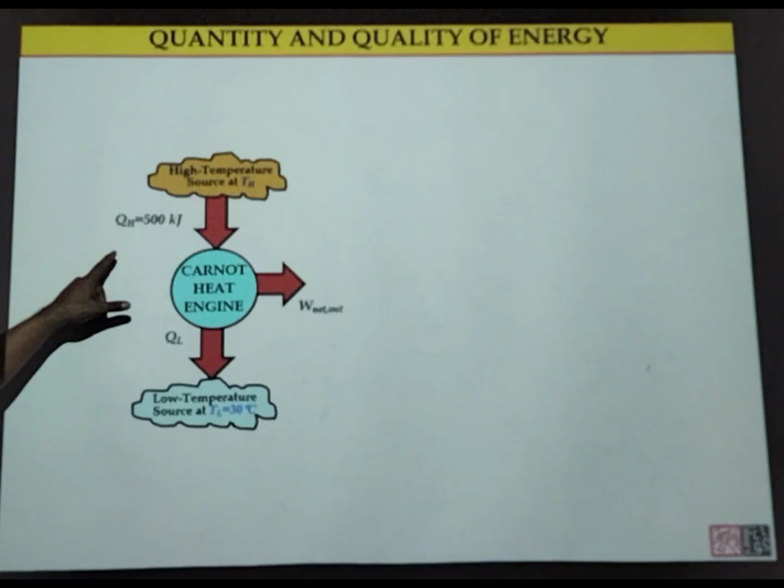Okay, the difference between quantity and also quality of energy. For quantity of energy, they cover under first law of thermodynamics. Any quantity, for example QH equal to 500 kilojoule, W net equal to what? 100 kilojoule. That value refers to the quantity of energy, which is covered under first law of thermodynamics.

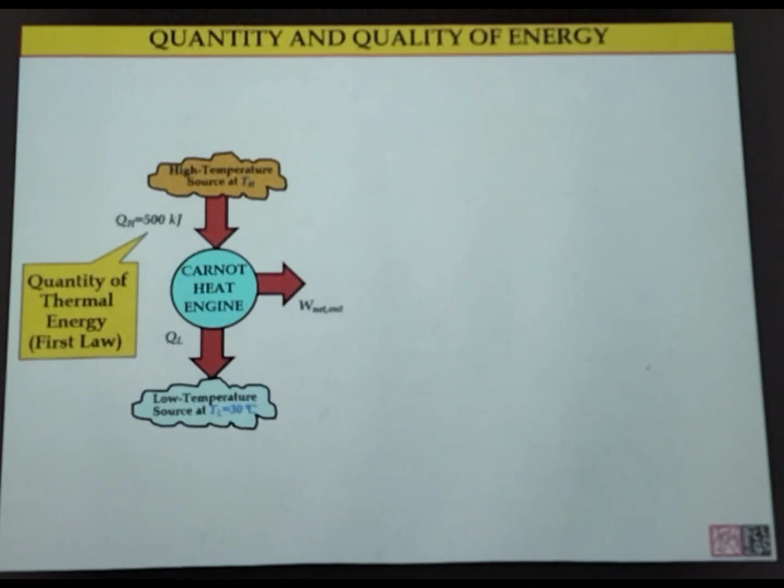If you consider second law, when you calculate the thermal efficiency for reversible process, for the ideal case, and compare with the actual one, that particular calculation will show you the quality of the energy.

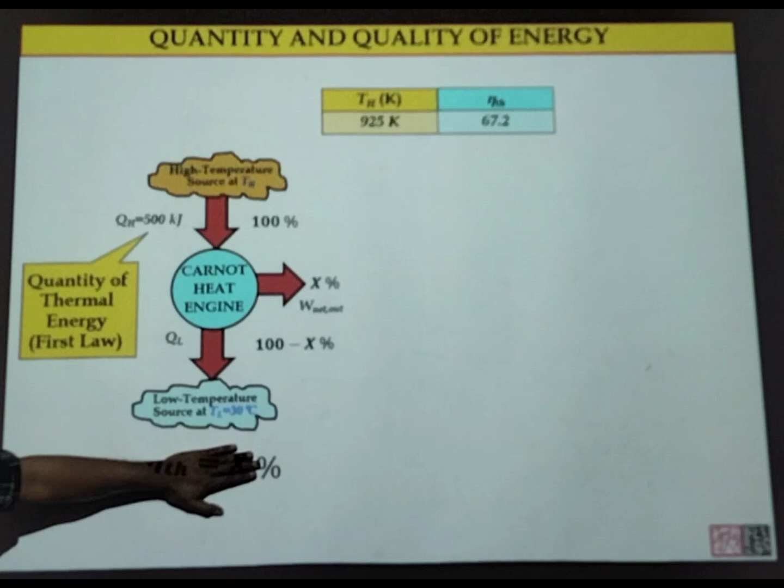Okay, so now if you look, for example, the temperature for TL is the same, maintained at 30 degrees Celsius, and you change the value of TH, for example to 925 Kelvin, so you will get thermal efficiency of 67.2%. If you decrease the value of TH, you will get lower thermal efficiency for the maximum performance, and so on. So that's why when you calculate the thermal efficiency for the reversible process, this will give you the description of the quality of energy.

Okay, if you compare this with the irreversible process's thermal efficiency.

And here we will have new terms. Normally we learn in Thermodynamics 2 the term that we call exergy. We will learn this later. Okay, exergy.

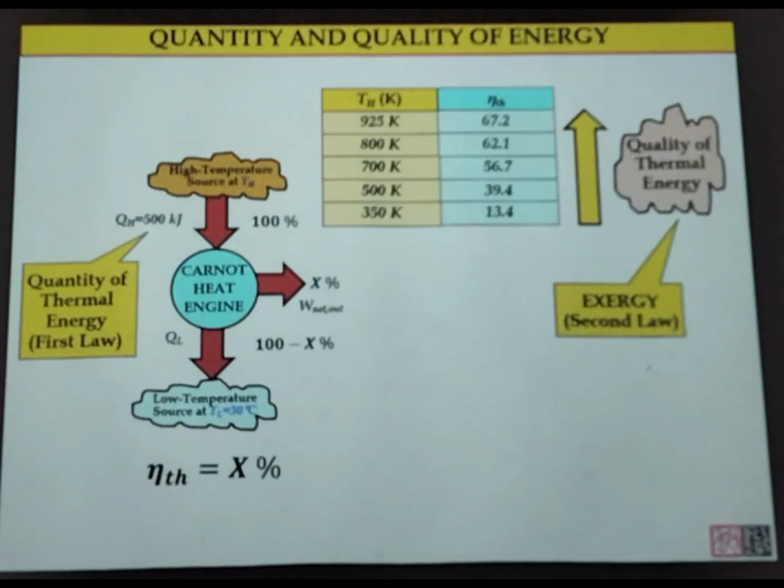Okay, earlier we discussed heat engine. So now we discuss the heat pump. It's more or less the same, only the difference is in the schematic diagram and also the formula. Schematic diagram for the refrigerator and also for the heat pump. Going back, QH, QL, W net, the direction of the flow is different compared to the heat engine.

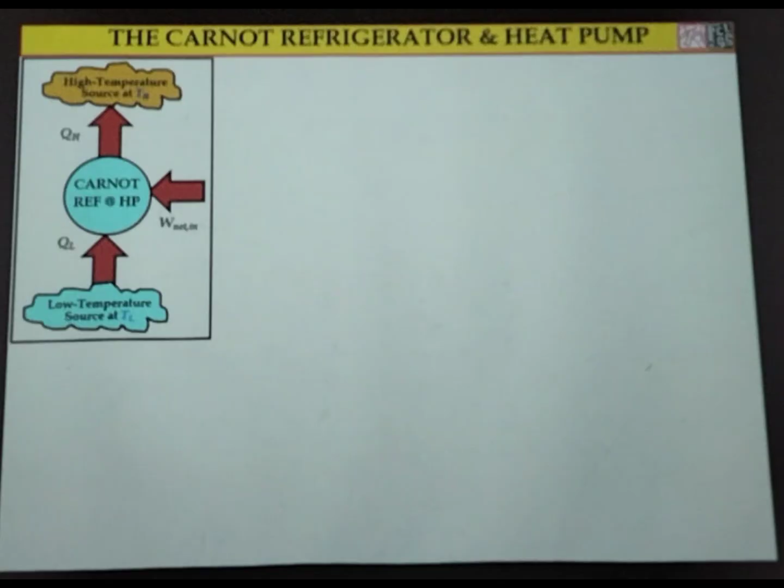Okay, coefficient of performance, general formula COPR equals 1 divided by (QH divided by QL minus 1). Originally here it's Q out divided by Q in, right? Is that correct?

Okay, for COP, for reversible process, instead of using QH and QL, you just change to TH and TL. For the maximum performance, the best performance for the refrigerator and also for the heat pump, you need to consider the reversible process, and the formula is this, where you just consider the temperature of the high temperature source and the temperature of the low temperature source or sink.

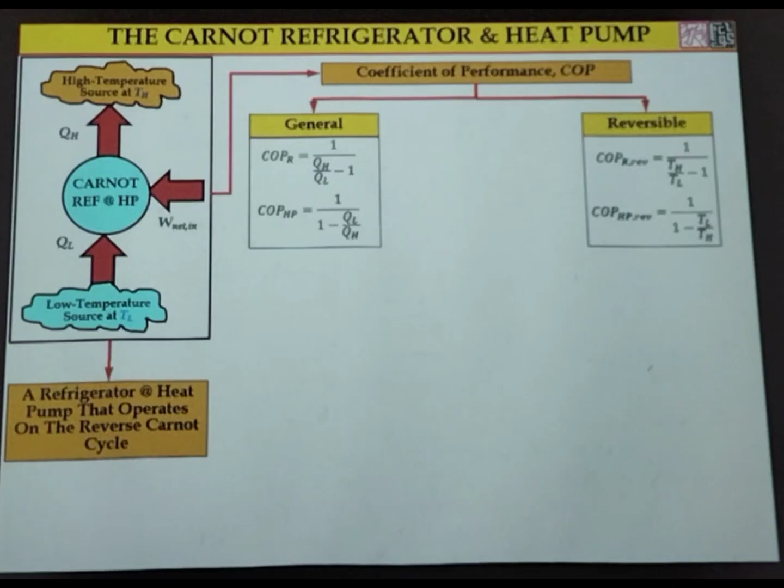Is there a difference compared to the heat engine formula? Heat engine formula, thermal efficiency versus COPR, right? Thermal efficiency is 1 minus TL over TH. But for COPR, it's 1 divided by (TH over TL minus 1). For heat pump, it's the reverse, the TL over TH.

Okay, so we consider this formula. If you calculate using this formula, it will give you the maximum performance of the refrigerator and also for the heat pump. If asking for maximum, but if actual, it will be lower.

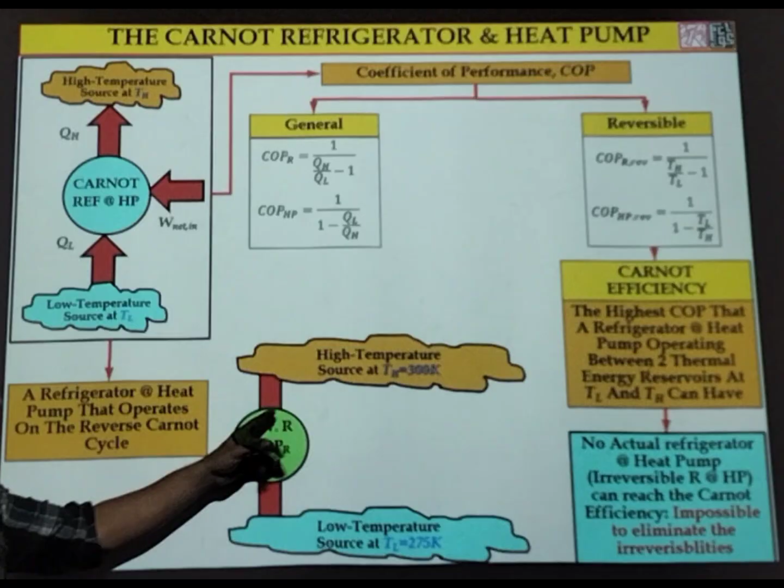For example, the temperature TH equal to 300, TL 275 Kelvin. If you calculate using this formula for refrigerator, you will get 11. COPR has no unit.

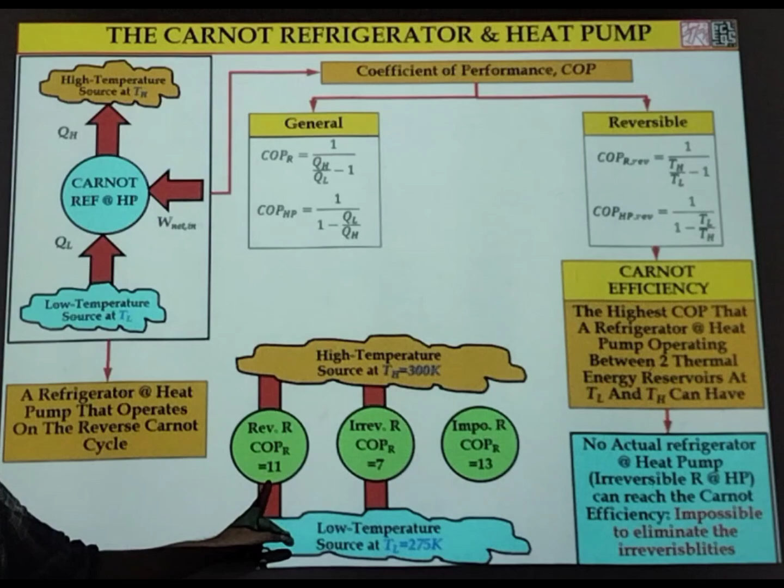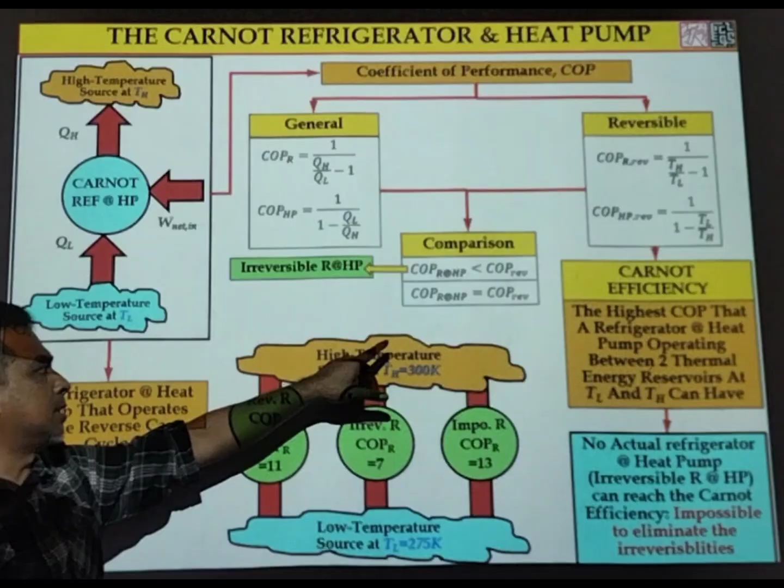On the COPR or COPHP for reversible process. So if the actual COP is less than COP reversible, and the process is irreversible, that's fine; if the actual is greater than the reversible process, it's impossible.

Correct? For example, the question asks you, after you calculate the maximum performance and also the current performance of the system, what kind of process is it, is the process impossible or possible? For example, you need to check and compare the current value, the actual value, with the maximum performance of the system.

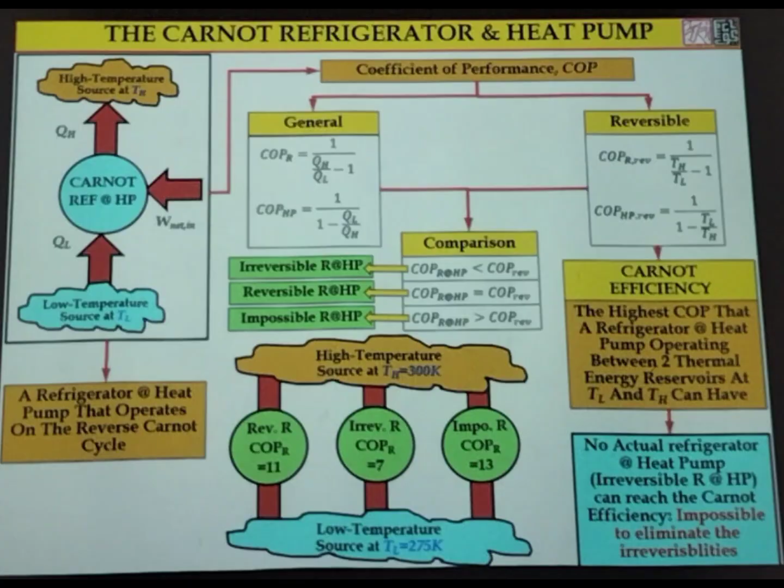Maximum temperature already given as 20 degrees Celsius, which is TH. Minimum temperature negative 8, referred as TL. So you have QH, QL. Maximum and minimum temperature is 20 degrees Celsius and negative 8 degrees Celsius respectively.

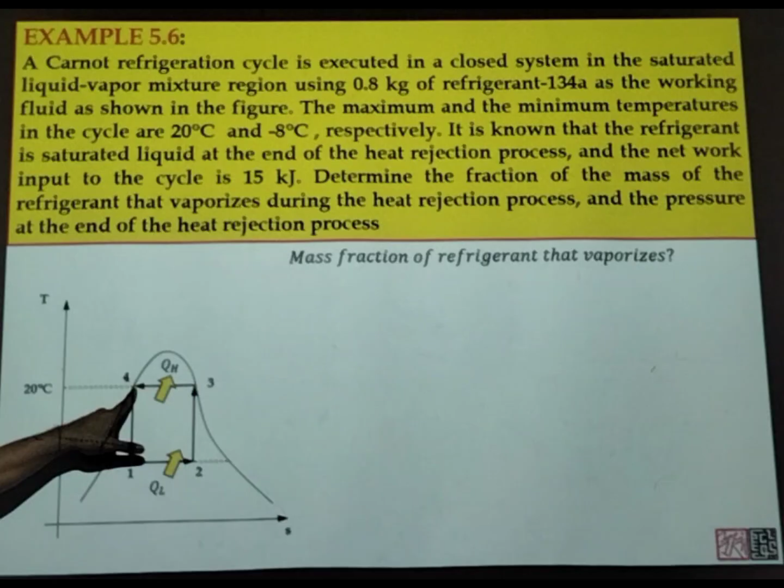Number 4 here, it says saturated liquid. Is it correct here, saturated liquid? Here is saturated vapor, here is saturated liquid, right? So that's the meaning of the sentence.

Of the heat rejection process, and the net work input to the cycle is 15 kJ. What is this 15 kJ? 15 kJ net work input. What symbol? We only have three: Q in, Q out, and the other one is W net. W net in for the refrigerator must be W net in, there's no W net out. So 15 kJ is W net in.

Determine the fraction of the mass of the refrigerant, and the process. So what is being asked here? Mass fraction.

Okay, look at the steps. We calculate COPR. COPR is easy, you can calculate COPR just based on TH and TL. So you need to identify which temperature TH refers to, which temperature TL refers to, and the value must be in Kelvin. We get COPR.

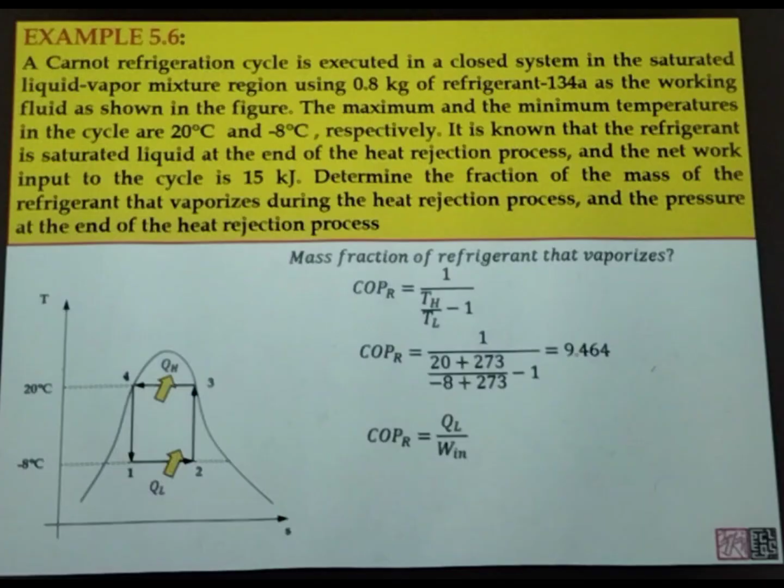Based on the general formula for the refrigerator, QL divided by W in, right? Why do we use this formula instead of QH divided by W in? QH divided by W in is the formula for heat pump. This formula involves the refrigerator phase, so it's QL divided by W in. You already calculated COPR, W in is already given, so you can determine QL. Correct?

Now the aim is to manipulate the saturated liquid point here to find the mass fraction. Total mass already given is 0.8. So you need to know the mass flow rate here, mass of evaporation, mass total is already there.

So QL formula equals Q equals M dot times HFG. Why HF? Why HF? We have HG, we have HF.

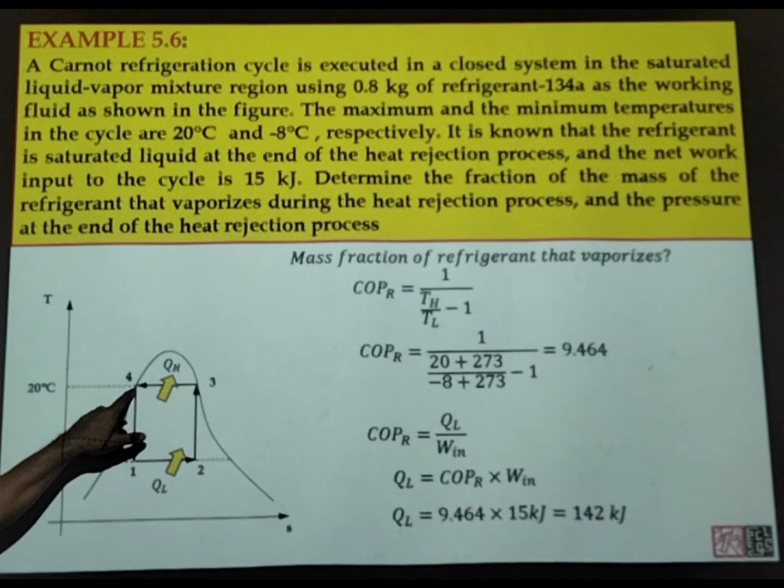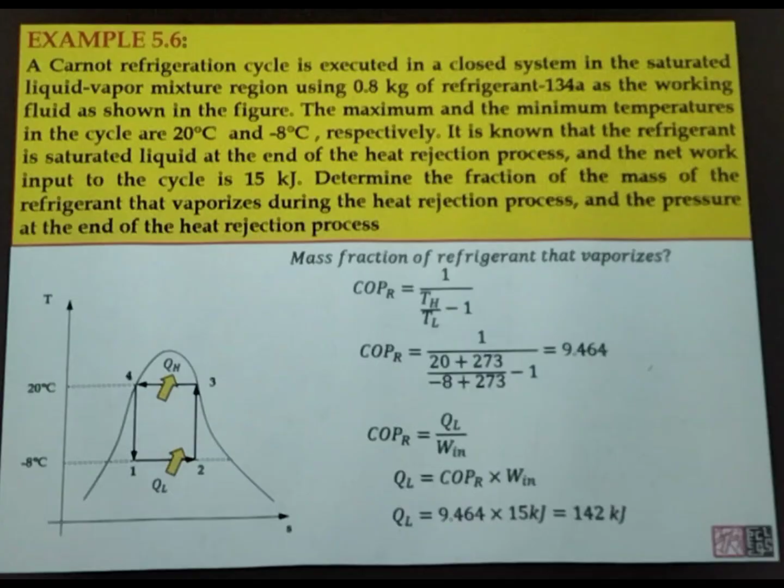Saturated liquid, here is saturated liquid. F, G, F - that's why the formula Q is M dot multiplied by enthalpy. General formula Q equals M multiplied by enthalpy difference. That's how we get this equation.

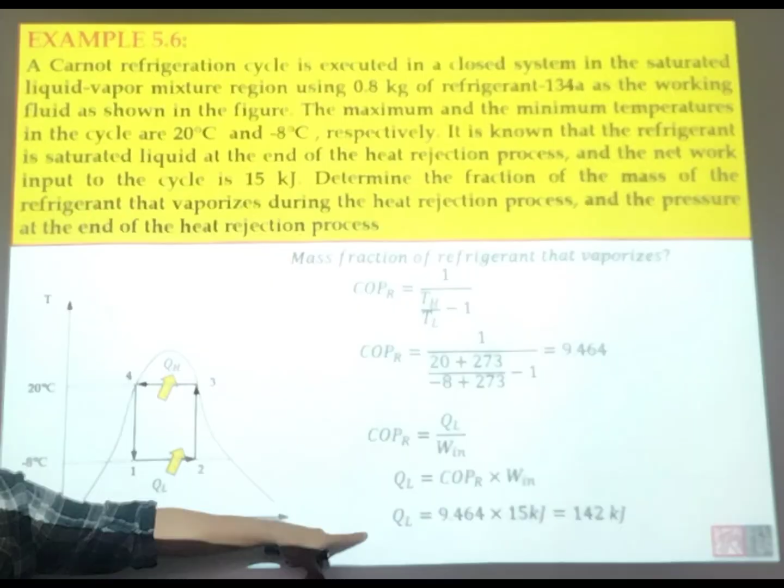Okay, now our QL. So now we manipulate QL to determine mass fraction. M evaporation we know, QL we know, right? 142 kJ. What we don't know is this one - sorry, MFG, sorry MFG.

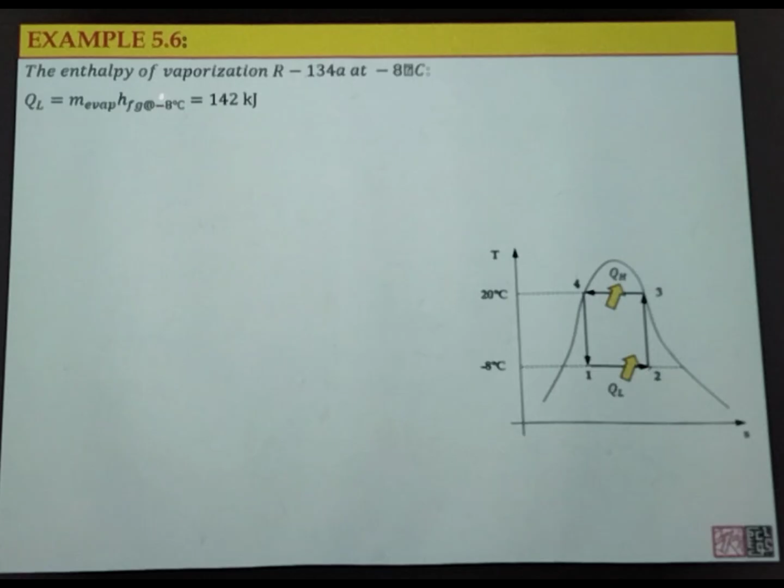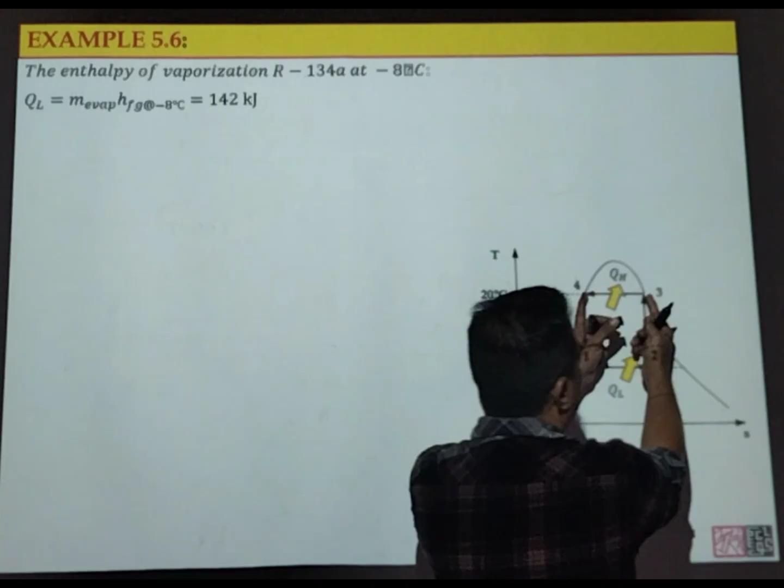Because of the temperature enthalpy difference. This is the evaporation process here. We have H3 minus H4. H3 is actually Hg, H4 is HF. So H3 minus H4, check, is Hg minus HF.

So then you need to find W net in, the minimum, the smallest. So for maximum capability for COP HP, you need to calculate this formula. Temperature TL already given plus 273, TH already given plus 273, you get maximum 11.3.

Betul ni? COP boleh tak? Yeah?

Lepas tu you go back to the general formula because you want to determine W in. QH ada tak? Dah ada kan? COP HP dah dapat untuk the best performance. You akan dapat W in. So this is the minimum W in for the heat pump, 3.32 kilowatt. Okay, satu. You kena bezakan.

Kenapa dia tanya minimum power? Kenapa dia tanya maximum power? Kalau untuk heat engine, dia akan tanya maximum power output. Lagi banyak W out, lagi bagus. Betul tak? So the maximum power output that obtained from Carnot cycle, itu adalah maximum capability. But the best performance for heat pump, for refrigerator, dia kena bagi minimum W in. Kalau you bagi minimum W in, lagi bagus performance. Kalau you bagi banyak W in tak bagus sebab dia kena supply more electricity. That's why dia tanya minimum power required, minimum power input. Kalau output maximum, kalau input kena minimum. So minimum you dapat daripada sini.

Heat engine, maximum, best performance, W net out mesti maximum. For refrigerator and also heat pump, W out, ini W in. Best performance for the compressor inside the refrigerator or heat pump, W in must be minimum. Ini best performance. Sebab refrigerator, heat pump dia pakai compressor. Yang ini you ada hasilkan rotational movement of the shaft dan so on untuk heat engine. So in term of question, dia akan tanya ini maximum, dia tak akan tanya minimum work output for heat engine. Dia akan tanya maximum power output, ataupun maximum work output. For refrigerator, heat pump dia akan tanya minimum W in, power input, atau minimum work input.

Okay, boleh tak? So dia akan dapat maximum, minimum, yang ini daripada COP HE, thermal efficiency for the heat engine. And you can obtain the minimum from COP R ataupun COP. Tidak? Boleh tidak?

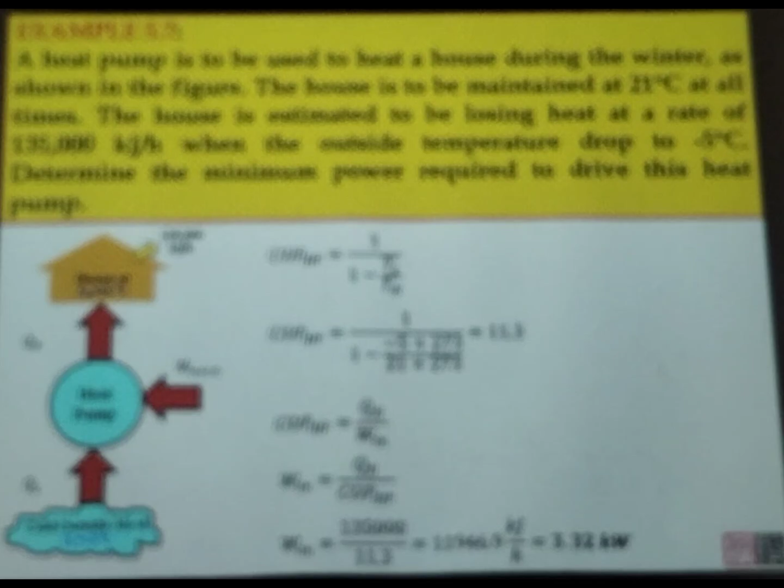Habis. Cuma yang ini start kat sini dulu, yang ini saya cover balik. Yang salah tak? Tak ada. Okay, sekarang in terms of preparation for final, saya bagi tahu.

Satu, ni chapter masuk. Tak salah, saya tengok aja. Ni belum detail lagi. Detail mungkin kalau hint mungkin minggu depan, 2 minggu akan datang. Kelas akhir. Cuma chapter yang masuk 3, 4, 5, 6. Okay.

Example question untuk final saya tak ada. Kan? So you study, you kena boleh buat semua soalan tutorial. Yang kena boleh buat paling kurang, dan juga plus example dalam lecture note. Jangan study macam study biologi, dia ada skema, baca, oh faham. Okey, ni senang ni. Ambil kertas, tutup solution, kira paling kurang. Lagi canggih, lagi bagus, you cari soalan lain. Betul tak? Ini paling kurang.

Yang problem kamu kalau calculation involve COPR, ini saya rasa okey, sebab formula dah ada. COPR kan, thermal efficiency, formula senang. Kan? Betul tak? So skill yang kamu kena ada, able to draw schematic diagram, kemudian use suitable equation. Equation tak susah.